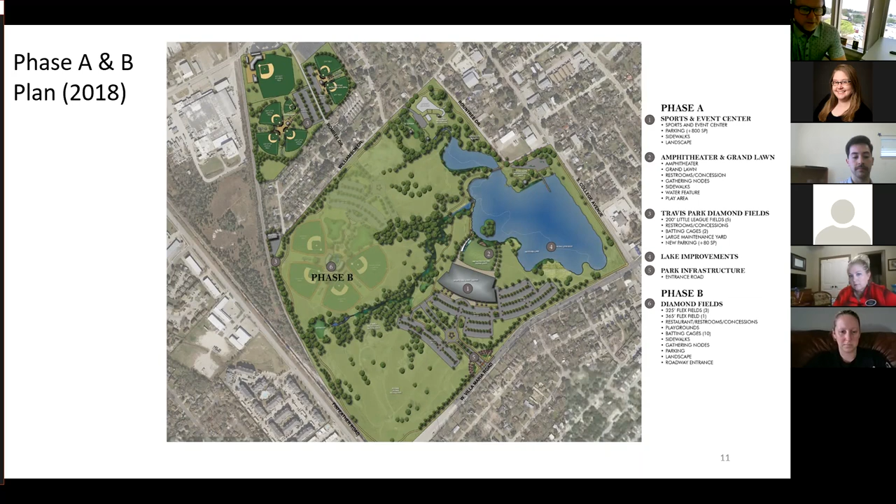Park infrastructure, an entrance road there off Villa Maria. And then phase B, maybe some type of flex fields, and that's still just TBD even today. So nothing's really changed in that.

And then in March of '19, we entered into a service agreement with Stonehenge Holdings out of Conroe, with the possibility of trying to get some private funding with some type of profit sharing - some type of entertainment, maybe somebody to come in and build a big indoor facility for us, and then they would manage it and run it, and the city would maybe profit share out of it, some type of an agreement.

That went on for about 5 months, and then we canceled that. There wasn't really much happening there, and didn't seem to be a lot of private money out there to do that sort of thing with. So we backed off of that and decided we would go at it on our own.

November of '19, we issued a notice of intent for about $75 million in bonds, and then signed an engineering contract with Mitchell & Morgan, a local engineering firm. And then they immediately went to work.

We knew what we needed it to look like from our master plan. So there was an ordinance passed by council reducing the speed limit there on Villa Maria for the Midtown Park Boulevard entrance into the park. And then a resolution was also approved by council notifying the intent to finance expenditures or bonds. In January, those bonds were authorized.

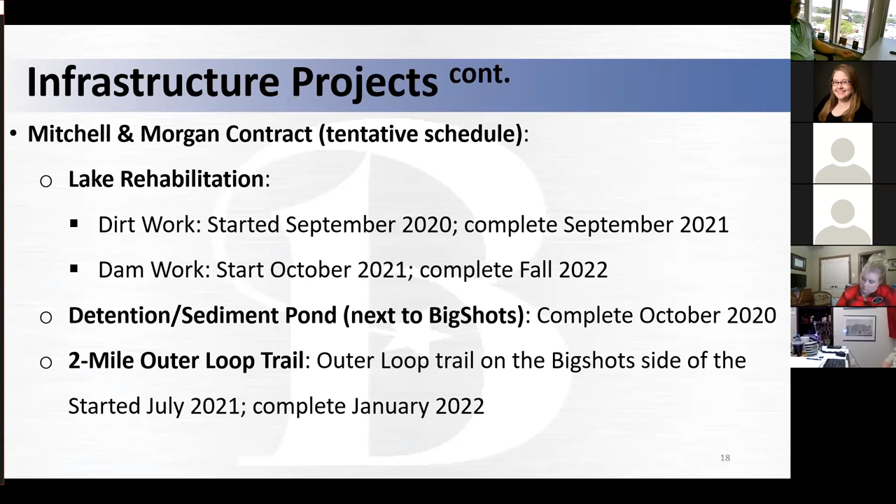If anybody's driven by it in a while, up Villa Maria, the gateway and landscaping's been completed there on the entrance off Midtown Park Boulevard. Big Shots driveway was started in June, and it'll be completed in October. Something that was added, the Midtown Park Boulevard is being extended all the way to Williamson, which is right there at the end of Bomber, where it comes from Carson. That'll be complete in April.

Our sports and event center is a little under 123,000 square feet. We signed a design build agreement with SpawGlass and PBK Sports back in July of 20. We hired Sports Facility Management out of Clearwater, Florida, to not only advise us and help with the layout of the facility, but they manage about a dozen indoor and outdoor ball fields throughout the U.S. We actually have a management agreement with them to operate the facility once it's open.

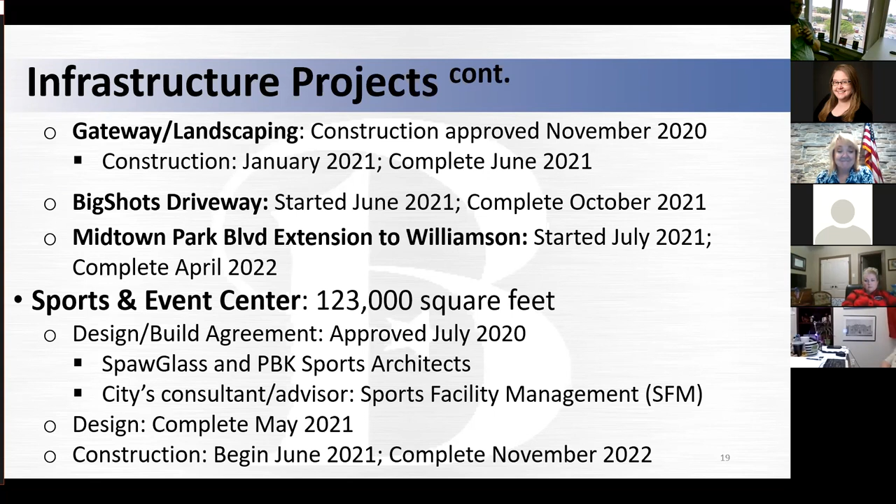The design was complete in May. Construction was started in June, and we should be complete, depending on weather days, in November of 22. So that's coming along really good.

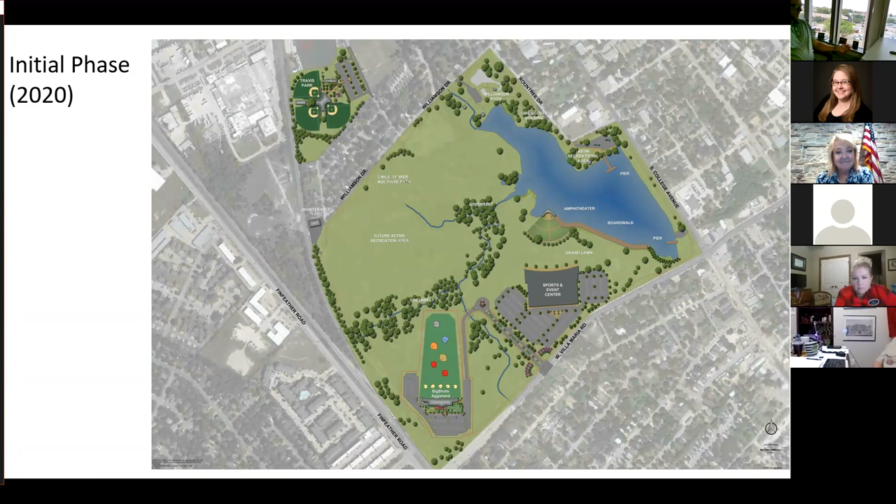So the final master plan we saw a while ago had the Big Shots. After we started working with PBK and SpawGlass, the architects asked right up at the beginning, where do you want the back of the building to be? In other words, where do you want the dumpsters and the loading docks and everything else? In this configuration, we really didn't have a location for that. Everything was visible from the park.

And then there were other discussions that went like, this really isn't something that needs visibility from a road or a street. You don't need traffic because it's a destination. People are coming from out of town.

They're coming to go to a tournament that their kids are playing in, or to watch something there at the indoor facility. So there's really not any use in putting it right on Villa Maria.

Our city manager and the mayor were really wrestling with having, I think this was showing 800 parking spots, all being seen in Villa Maria, and that really wasn't preserving that green area. We still need parking spots, but we felt like we could spread it out a good bit to where you just didn't have a big black spot within the park.

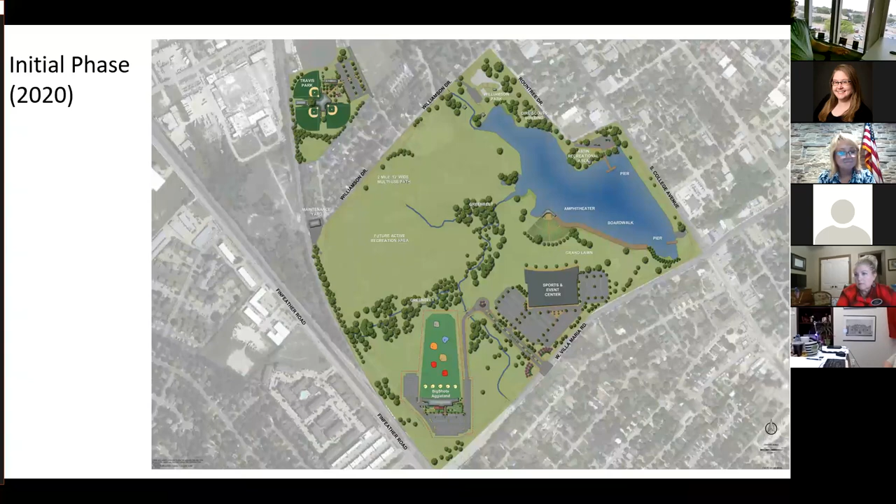So within that first meeting, we rearranged it and moved the indoor facility back on the backside, right off of Williamson, at really the intersection of Williamson and Bomber. To do this configuration, we actually had to go ahead and extend Midtown Park Boulevard all the way through to Williamson. You'll see this configuration here.

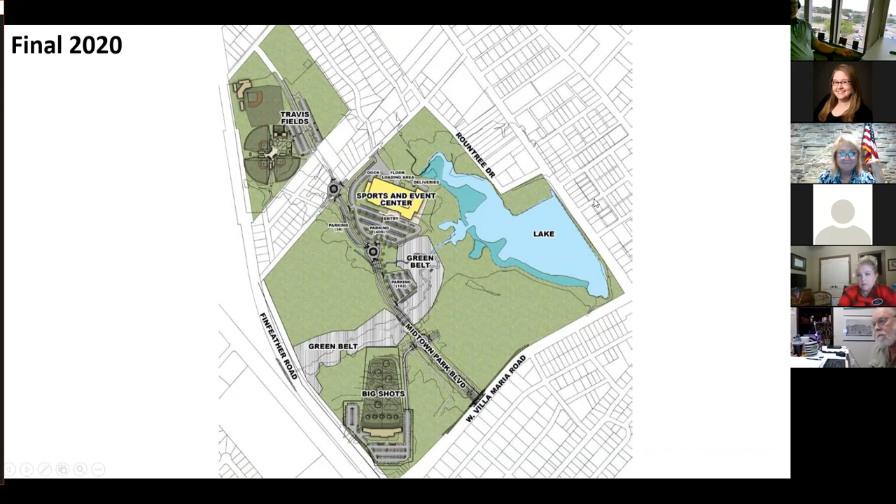This was the first roundabout that's built today. We're adding a roundabout here for entrance into the Legends Event Center, and then there'll be another roundabout at Williamson and Bomber. There's some other follow-up projects that'll happen in the future that'll redo Williamson, redo Bomber all the way down to the roundabout here. And then the South College project is coming up as well.

Legends Event Center will have 8 full-size high school basketball courts that can be curtained off individually or quarterly, however you want to do that. Those will be striped as well for volleyball.

It's just going to be a big open court area for gymnastics, wrestling, pickleball, archery, soccer, really anything that you could guess, cheerleading, trade shows, exhibits, concerts, mini conferences. There's even a separate e-gaming room in the facility, and we'll look at the floor plan here in just a second.

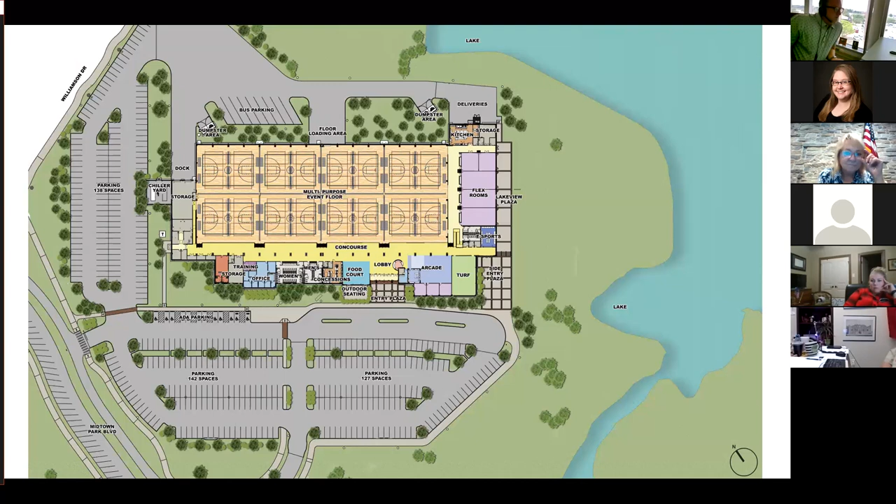It's a little different view. This just shows another view of the floor plans, flex rooms, esports rooms.

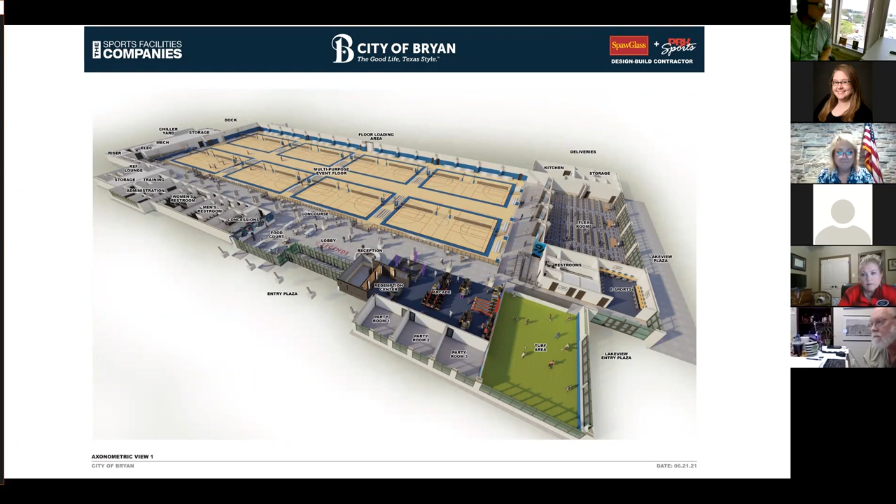This is walking in the front door, the kiosk to the right. They'll have an attendant there, and then this is what you'll see. Concessions off to the left. They've got a 10-foot halo video board for displaying and advertising current, what's happening, the schedules.

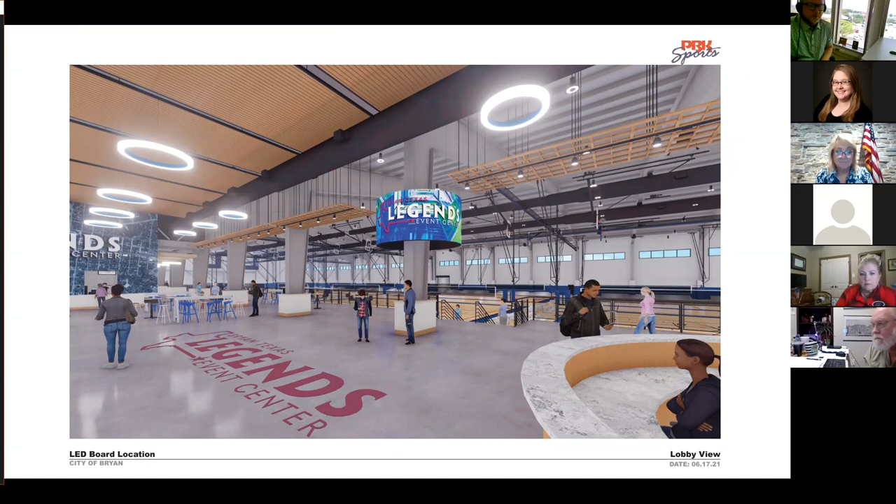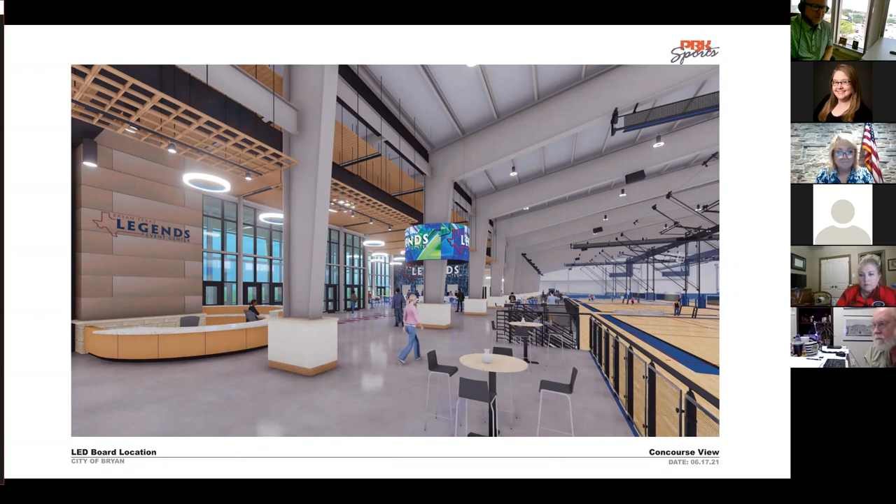This is from the court looking back up toward the front, back toward the concessions, the kiosk there. Tables set around the edge for families to eat and watch the games. Just another little different view from the concession area.

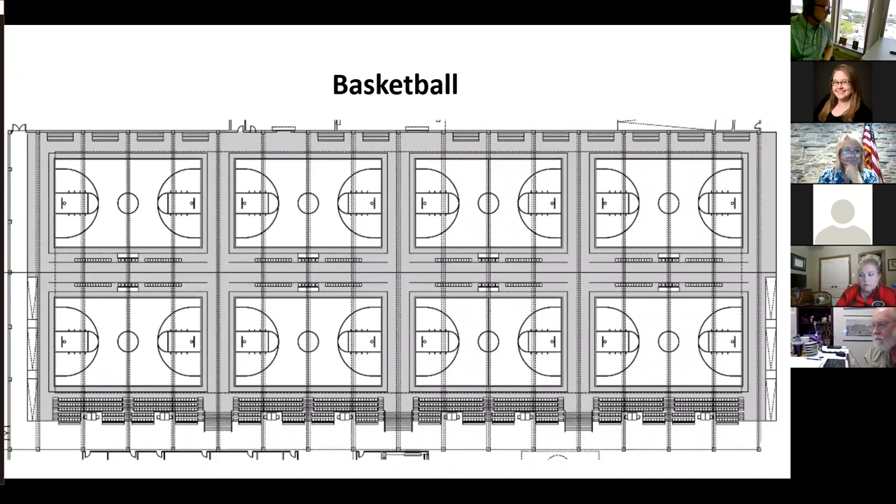Like I said before, the 8 basketball courts and then the 16 volleyball courts. SFM recommended using tip and roll bleachers for the different configurations. They can reconfigure. The way we're setting this up, they could go in about 8 hours and turn everything around from a full-blown basketball tournament to a full-blown volleyball tournament. All the bleachers and everything are tip and rolls.

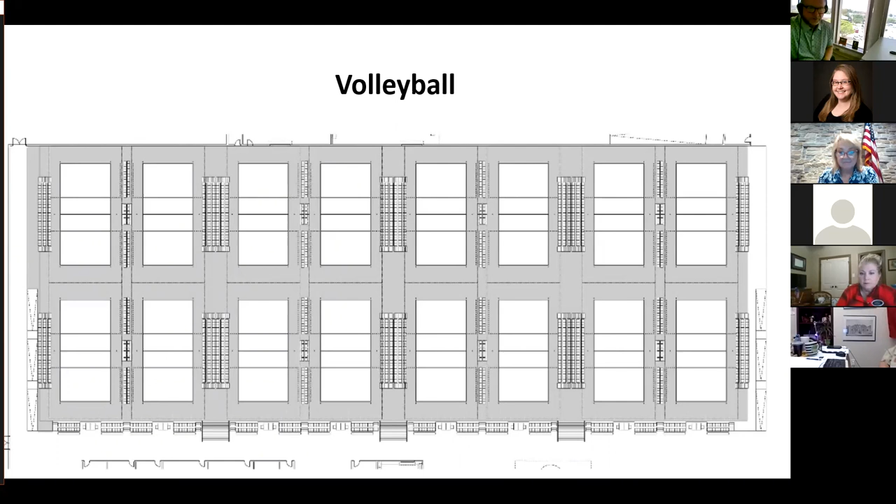There are some built-ins along that bottom side. I believe there's 2 rows of permanent seating, but the rest of the seating is made up of tip and roll aluminum bleachers. Just showing where you could shut down half of it with curtains.

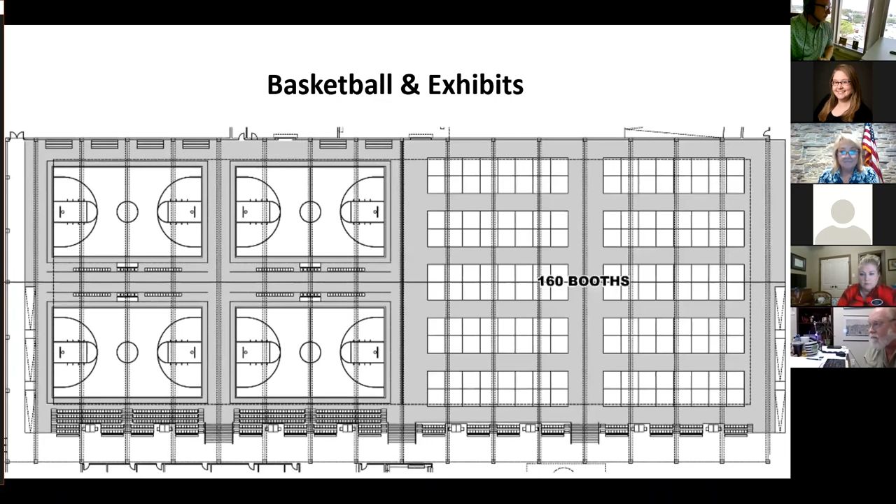We've got curtains that hang from the ceiling that will drop down, so you could do a concert on one end - not that you would want to do that, but you could have basketball on one end and do a concert or some other type of event on the other, or a trade show on half of it, 160 booths, double that to 320 booths.

And that flex meeting space, you could have 320 floor seats total in the full configuration, to a conference layout where you're actually separating the rooms with those division curtains, and then banquets and wedding layouts.

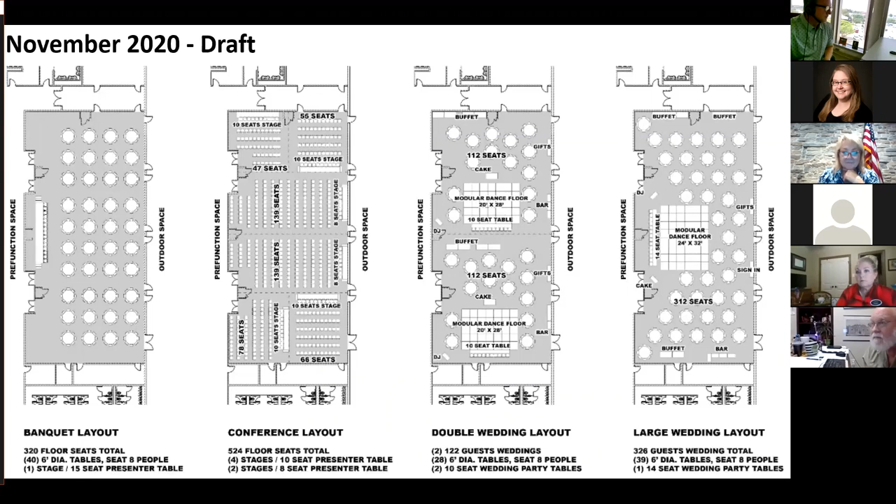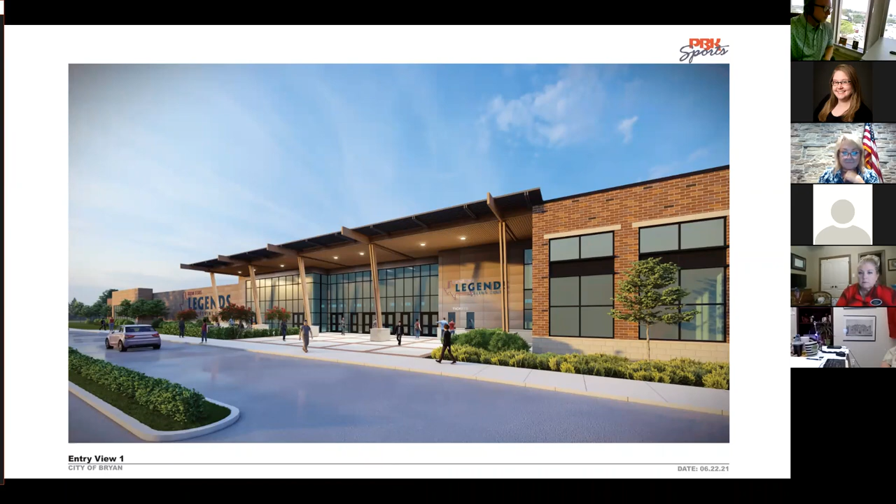Exterior, the elevations. This is using the latest colors. I think the brick may be a little bit darker now, but that's for the most part what the entryway is looking like. Just another view, seeing the patio on the right.

You don't see the lake there, but that patio will be looking down the full length of the 23-acre lake.

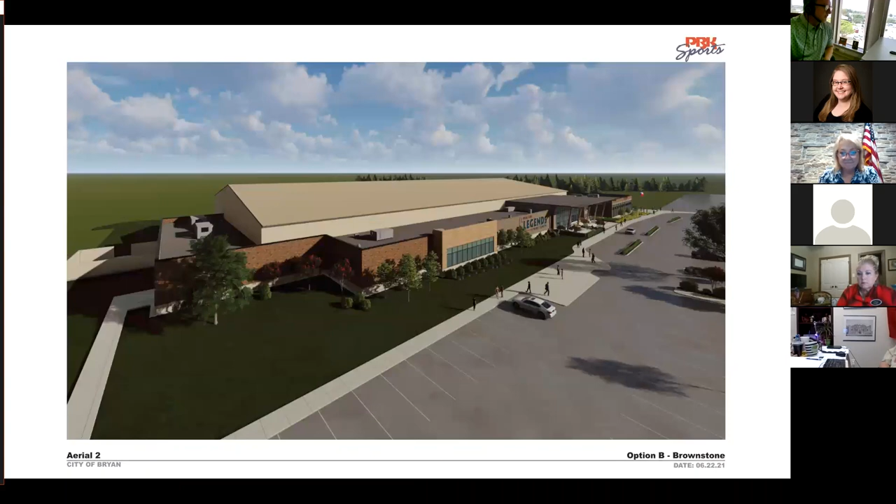It's another view there. That patio - we're not going to have the planters in there unless we go back and add those back in. But you can see, I think the architects at one time put in the renderings some sand volleyball courts.

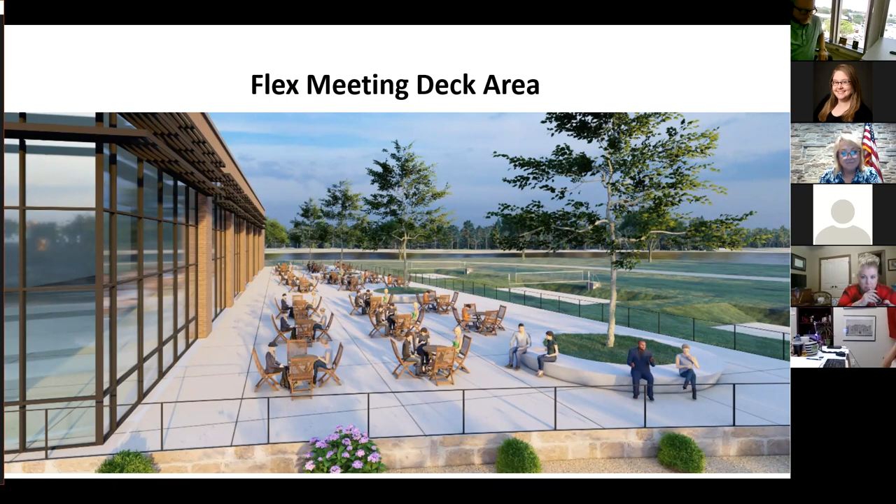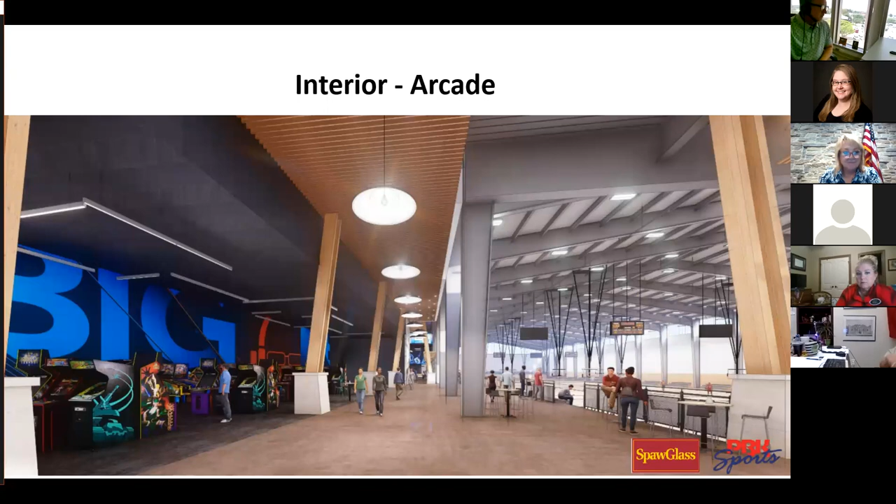This would be looking out of the flex space to the lake, arcades, and some other park amenities. There's going to be a boardwalk. That exact configuration hasn't been decided yet, but somehow we've got to work that in with an outdoor amphitheater.

There's going to be a couple of fishing piers. We've actually done an RFP where we've got some proposals for the lake to be professionally maintained. There'll be some water features, kind of like out at the Stella Lake out there.

There'll be 4 of those fountains in the water. Those are to help with the health of the lake, as well as they'll have LED lighting and stuff like that for lights at nighttime, so we can add some nice water features.

We're working with several different groups on doing some canoeing, kayaking, and fishing gear rentals for the lake. Of course, outdoor beach volleyball, we're waiting on a proposal from SFM on that. And I'm working with 3 different firms with NDAs right now, wanting to locate in or adjacent to the park. These are just - if we can get 1 or 2 of these, it would be awesome. It's just what it will bring to that area, redevelopment and just entertainment, family entertainment.

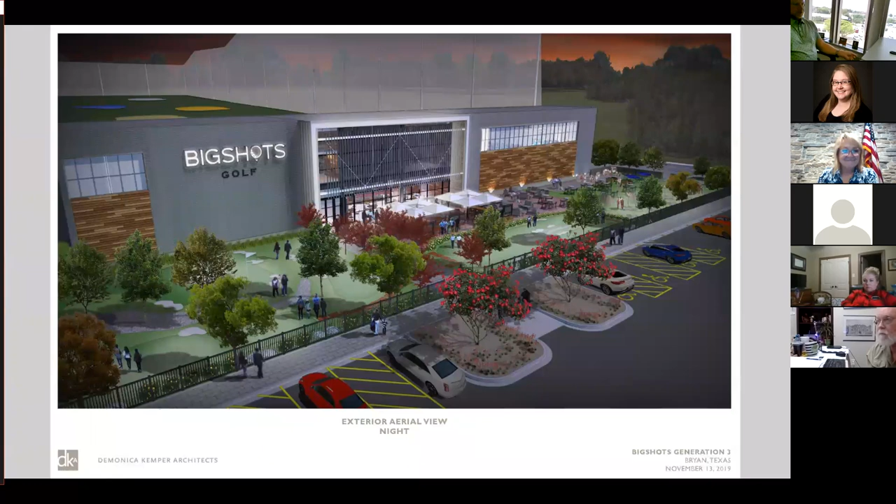Big Shots - we hadn't talked much about Big Shots, but like I said, they're supposed to be open by Christmas. We have a meeting every Monday morning and they're still holding to that. So hopefully we can make that. And their contractor tells me that they should be very close to making that. So we'll see.

That facility is owned by kind of a joint corporation called Big Shots Aggieland, Club Corp, as well as Dr. Jim and Allison Butler of Bryan College Station. Some of y'all may know them. About a $14 million facility and site investment.

Within the facility, we're looking at about 40,000 square feet with 60 bays. When I say a bay, that's one couch and seating area for playing the game, the golf. A lot of people know what Top Golf is, and I've been to both.

We toured the new Big Shots facility in Fort Worth about 3 months ago at their grand opening, and it's very, very similar to Top Golf. In fact, the Big Shots folks don't mind if you do call them Top Golf. It's the same principle - the technology is a little bit different. I think the one thing, the way it's been explained to me, is Top Golf uses sensors in their golf balls.

There are special golf balls that don't necessarily hit like a regular golf ball. I'm not a good enough golfer to tell the difference, or whether there's a sensor in the ball, but evidently the golfers can tell. Big Shots uses Doppler technology, like the Doppler radar the weather guys talk about, to track the balls. That's really the difference.

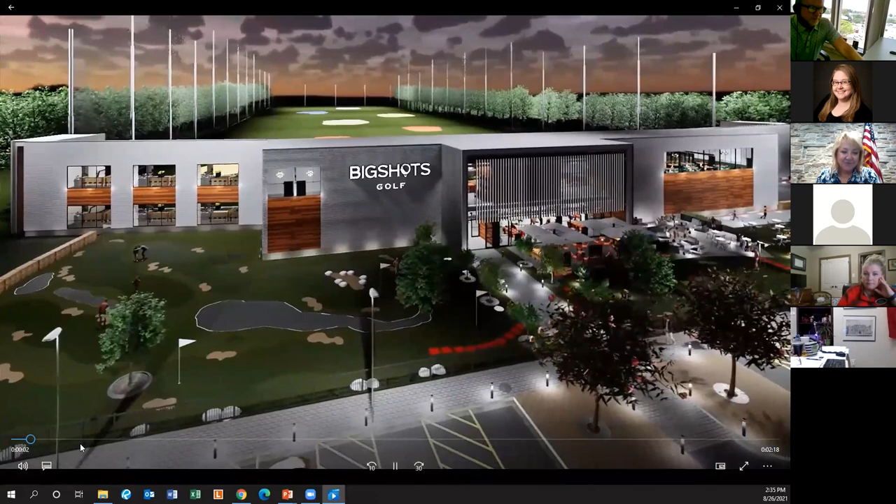Frank, we're not seeing the video. Frank, did you hear Rose there? We are not seeing the video, say that again. Are you seeing it, Rose? No, sir. Well, I'm seeing it, it was working earlier. At the top where you have your screen share, do you have it set to share just one window, or do you have it set to show your whole screen? Right now, are you seeing it where I have a link that says 'Bryan economic development'? Yes. Let me... if you go to your screen share settings, sometimes it will separate them out and just show one window, or you have the option of doing your entire monitor. I think that might be what's happening, but I'm not sure. Zoom is an interesting thing, technology.

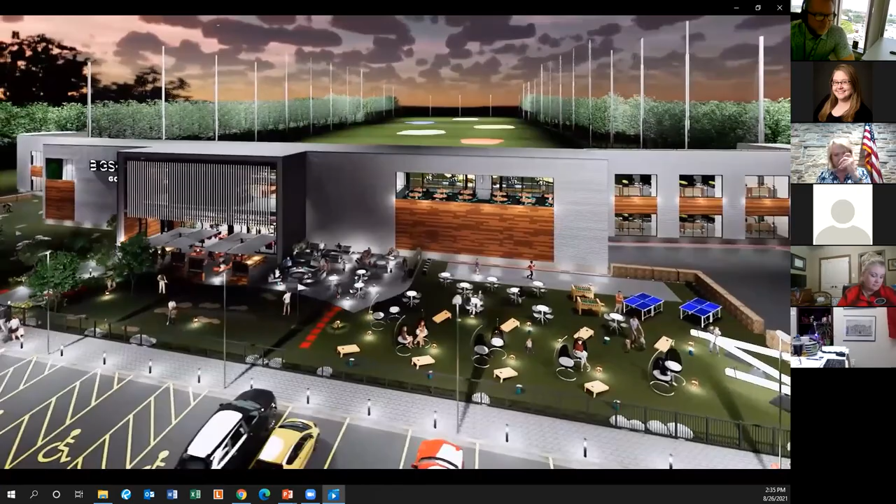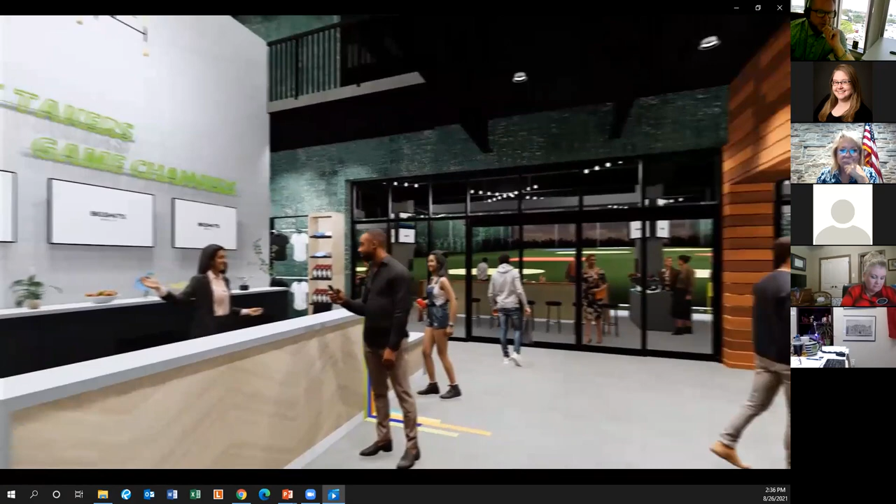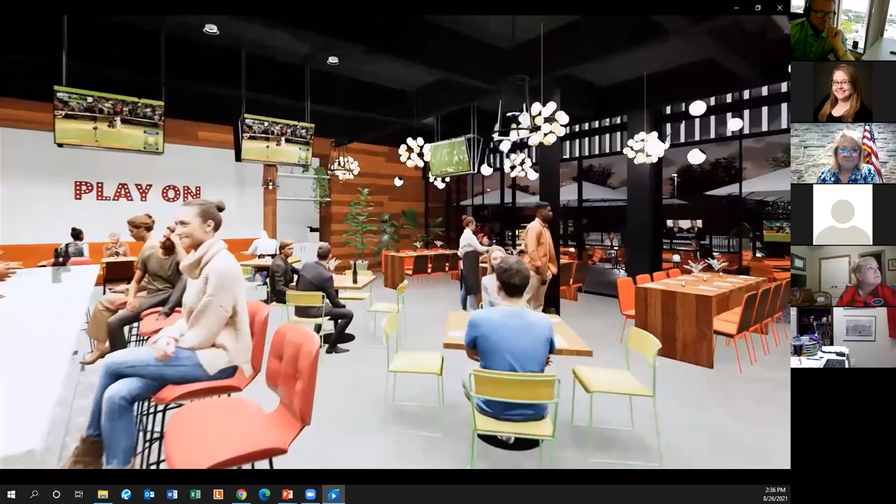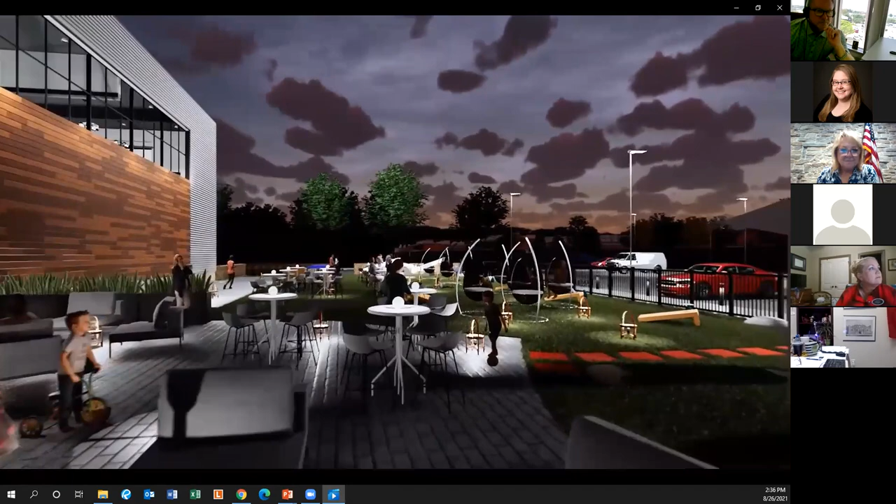And this is going into the entrance. What's neat about this facility is it's got a putt-putt golf out front that you can play, with seating areas as well. This is going into the entryway. Those that have been in a Top Golf before will recognize the bays out back. There's kind of a putt-putt area there too.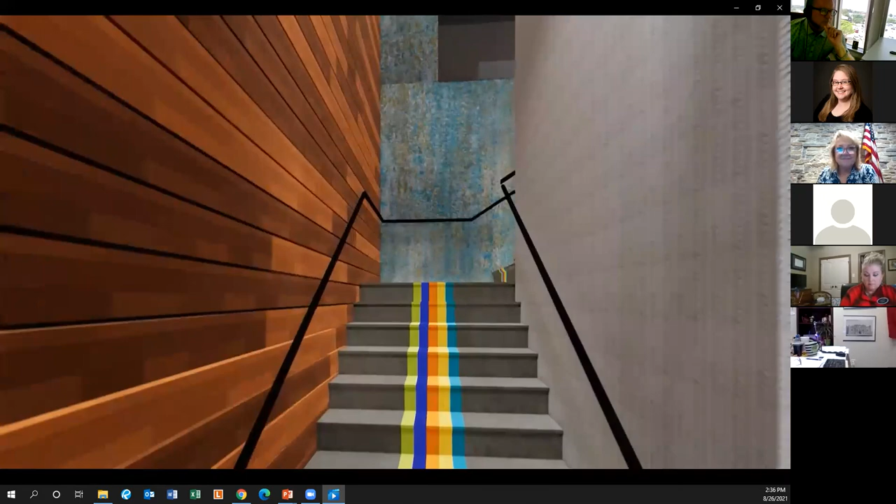The way this facility is laid out, it has 30 bays on the bottom floor and then 30 up top.

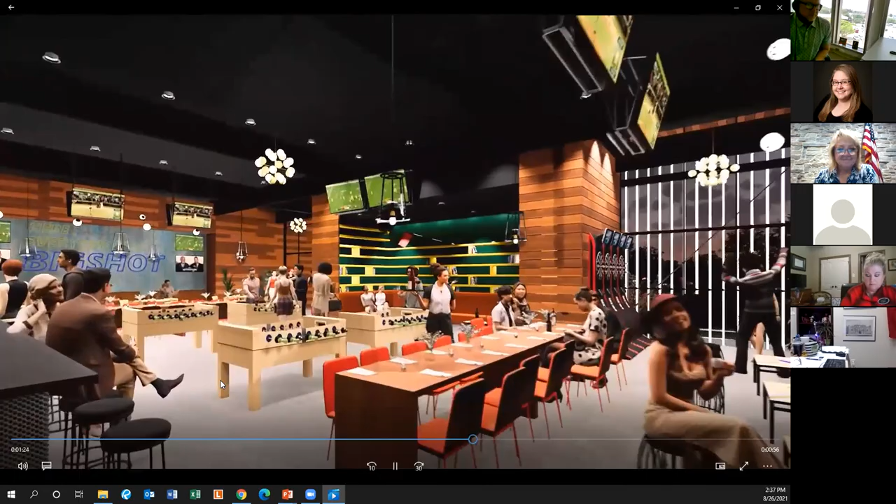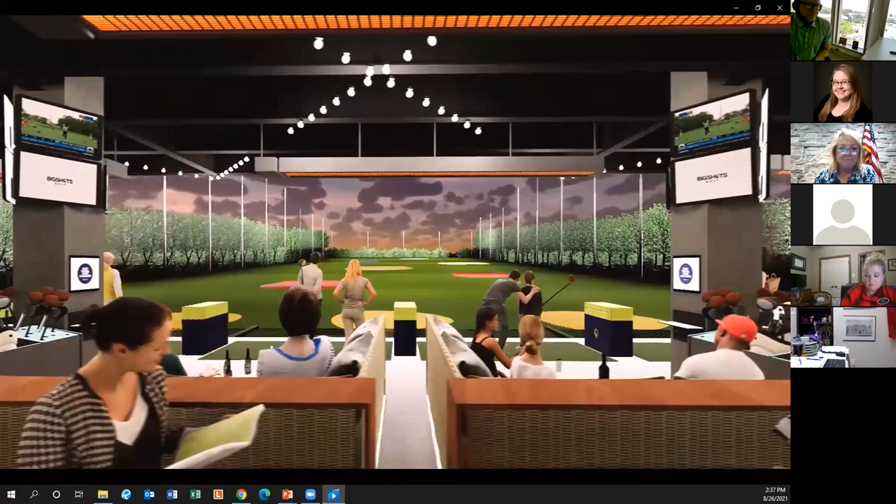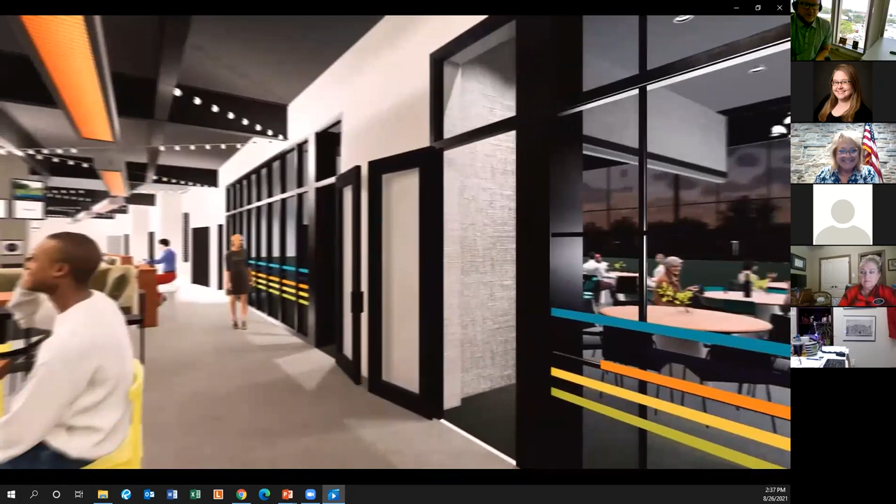Feels like we're in a video game, Frank. Well, you kind of are. I don't know who all's played it, but it's a lot of fun. Only problem is nobody's moving.

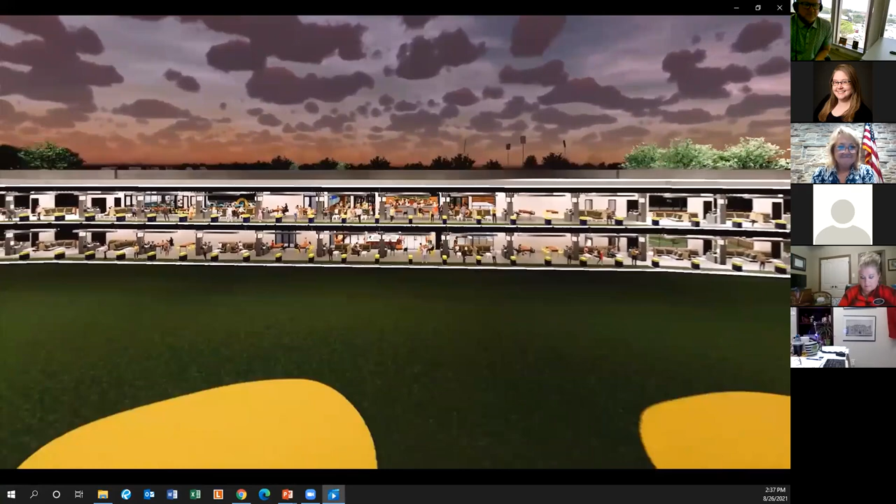Alright, are y'all seeing a new screen that says Construction Projects affecting Midtown? Yes sir. Okay perfect, alright we're back on track then.

As I said a while ago, there's some other projects. There's a project that was done on South College from Villa Maria to the College Station city limit line that's been finished for a couple of years now. That has a big wide multi-use path that A&M actually went and extended it on up to University, so all that's tied in. There'll be a phase 1, 3, and 4 that will take and improve South College Avenue all the way from Villa Maria to 29th Street, which is there at downtown.

Between now and '26, the first part of that will be done between Villa Maria and Carson. That construction is supposed to start in 2024. The engineering's been started on that, so we'll be able to hit the ground running.

Williamson Drive is the road that is really the back door there to the big indoor facility now. That work will be done out of the '26 bonds, and then Bomber Drive, Carson to Williamson, will improve that. And then something that plays into everything downtown is that downtown quiet zone, where that project has been started. I don't know if anybody's been downtown lately, but they've started medians or islands there at the crossings.

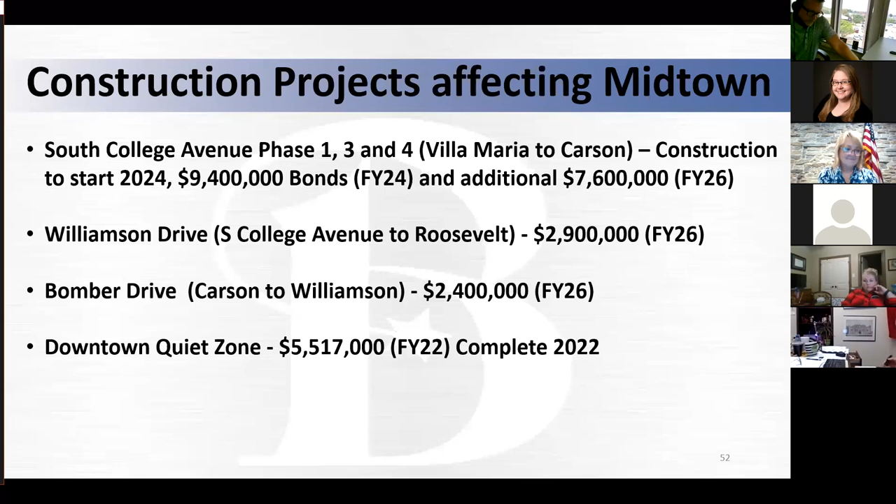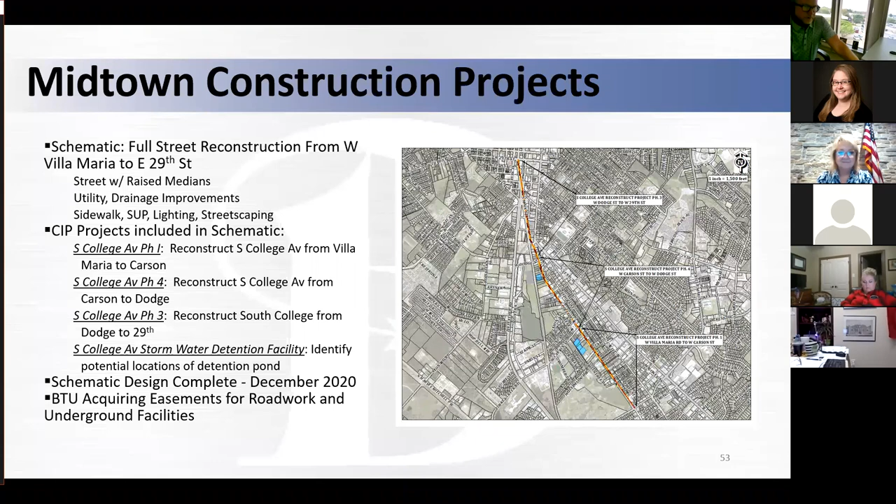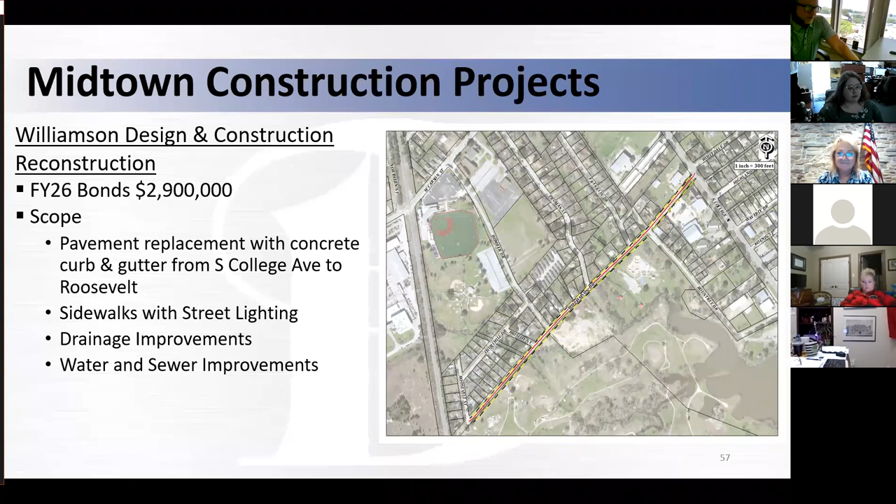So that's in the works, and I'm not going to spend a lot of time on this. This is just showing the different phases of that South College improvement. There'll be a big multi-use path and a sidewalk along Carson all the way to downtown that goes to University when this is all done. Anyway, if anybody has any specific questions or wants a copy of this presentation, I'll be happy to give that to them, but I didn't want to spend a lot of time on this. It's kind of a total package, total redevelopment of that area between A&M and downtown Bryan along that South College corridor.

So in summary, Midtown and Travis Bryan Midtown Park is what this project is. The lake will be through here in the next month. Travis Fields, October of this year. Big Shots Aggieland by Christmas '21, the Sports and Event Center.

It says summer 22, but it's really November of 22. In the future, we're going to have an amphitheater, but maybe the future will be some type of enhanced amphitheater, maybe around the stage area. We're going to have big green fields in the stage area. We may not be covered right now, we've only got so much money, so we're trying to save money here and there to make something happen with an amphitheater. Additional fields, we don't know what types are needed right now.

That'll have to come in the future. And of course, the boardwalk - the mayor is pretty adamant that we're going to have a boardwalk. So we're going to have a boardwalk, and then maybe some other expanded recreational activities and family entertainment.

Any questions and answers? I can show some actual drone footage of the construction site if anybody's interested. I did have one question: what is the square footage of the floor space for the basketball courts and trade show area? That's a little bit north of 80,000 square feet.

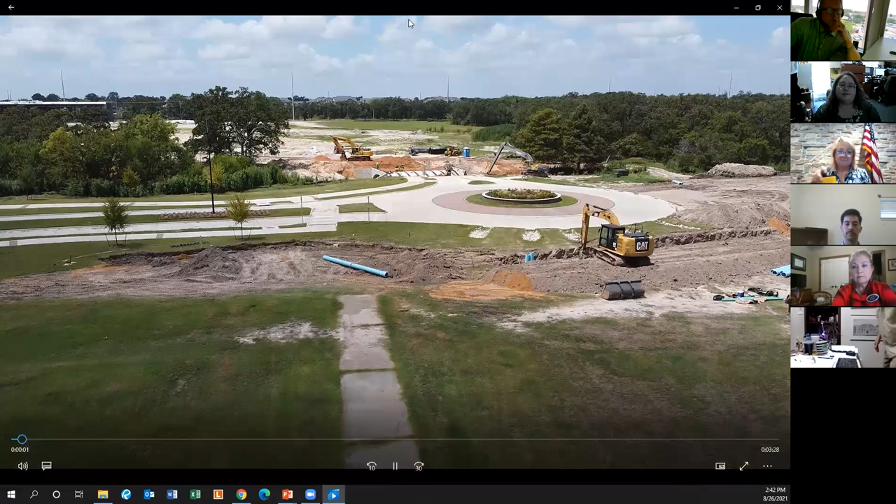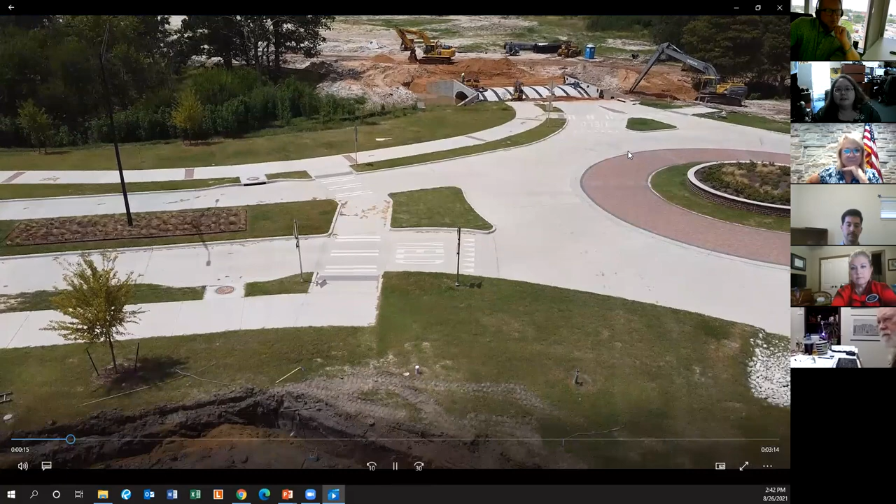All right, I think you can go ahead and show some drone footage, unless anyone else has questions. Let me see if I can get it to where y'all can see it. Y'all seeing the drone footage? This is the start of Big Shots driveway. This is the first roundabout. The landscaping has been done on the Midtown Park Boulevard.

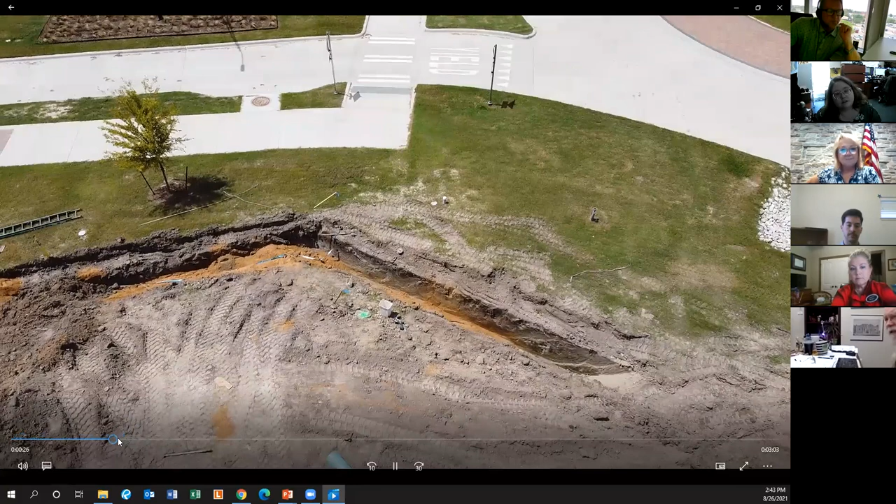This is the bridge for the driveway to Big Shots. I'm kind of fast forwarding because I've got an engineer driving the drone right now and he's interested in the water lines.

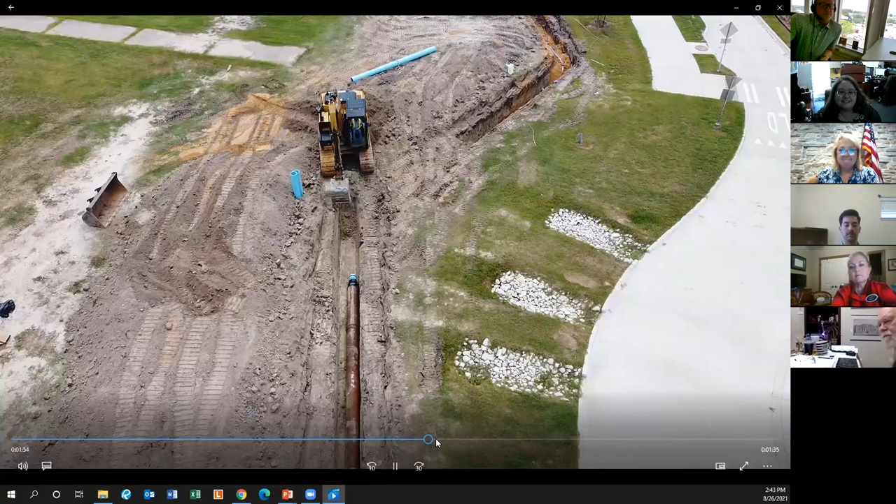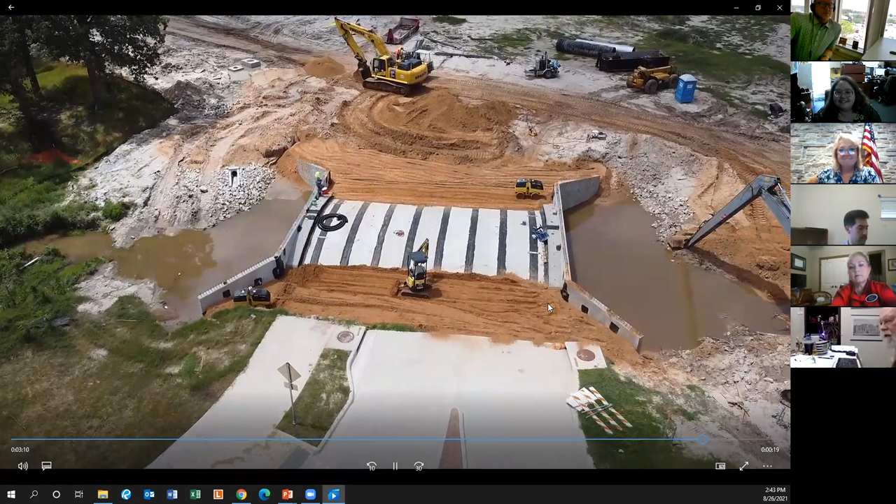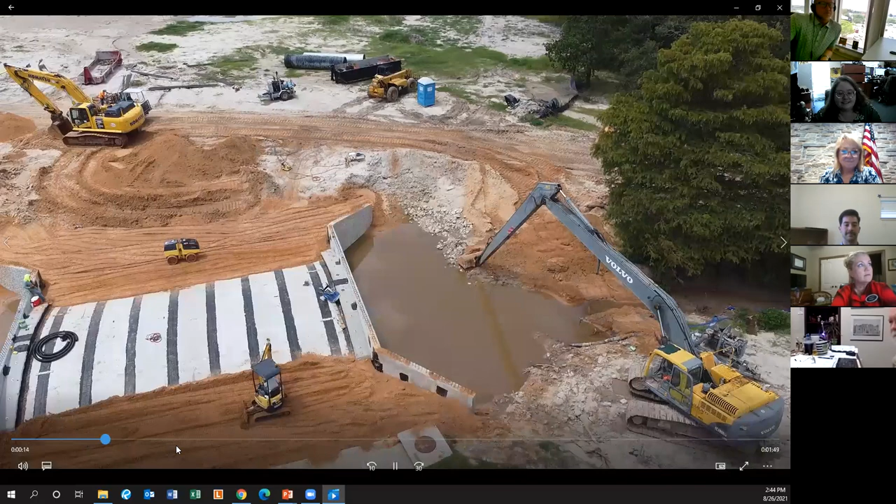I'm going to get a better video here in just a second. There's a driveway up to the Big Shots. And they're supposed to start putting their netting poles up in a couple of weeks. Once that starts, they'll do all their drainage and everything. For that whole part that you hit the balls, it's actually a synthetic turf.

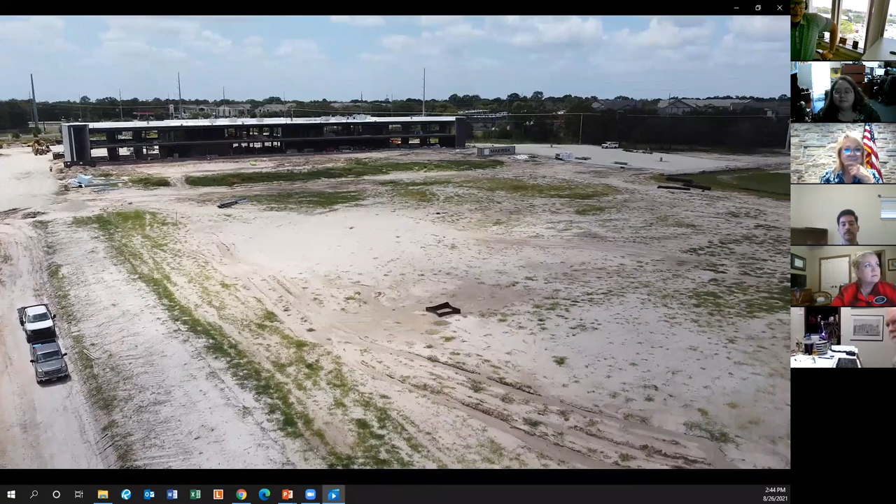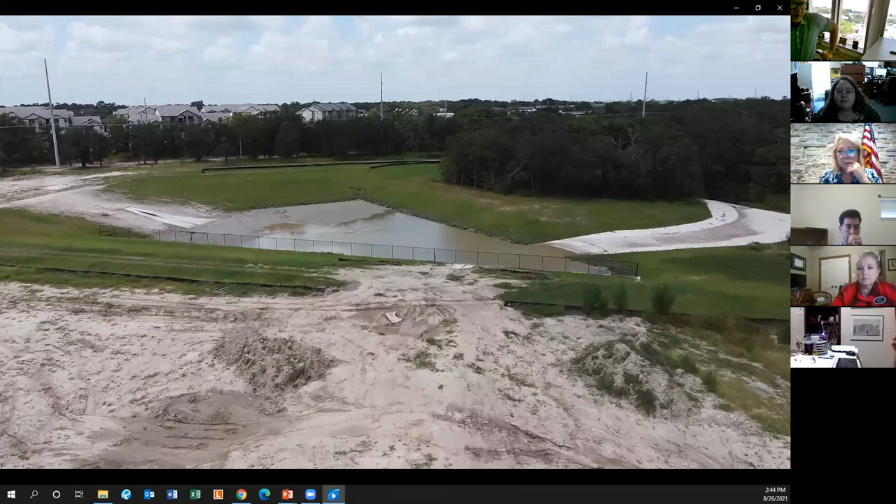Evidently they do that at the very last. There's that sedimentation pond I was telling you about a minute ago that we put in to capture that sedimentation. The way that thing is made, it's got a concrete wall on one side. Once that fills up with a certain amount of sedimentation, they'll just take front end loaders in there and scoop it out, and that prevents it from getting in the lake and filling it in.

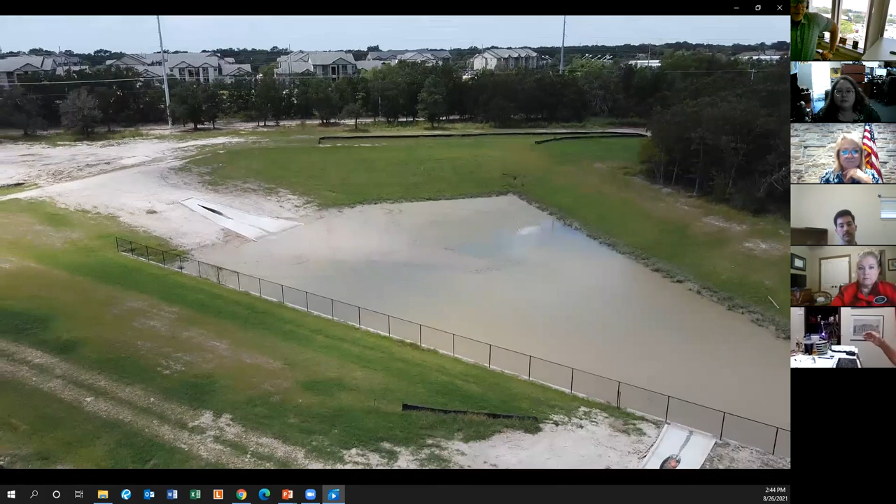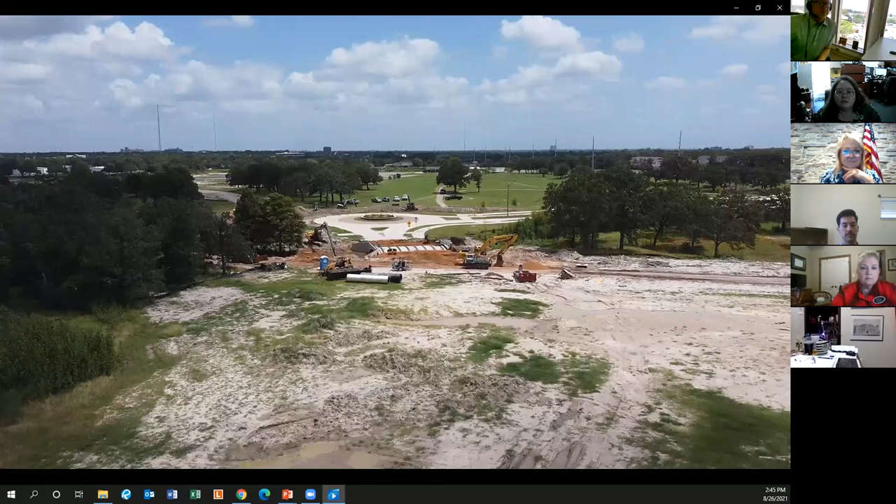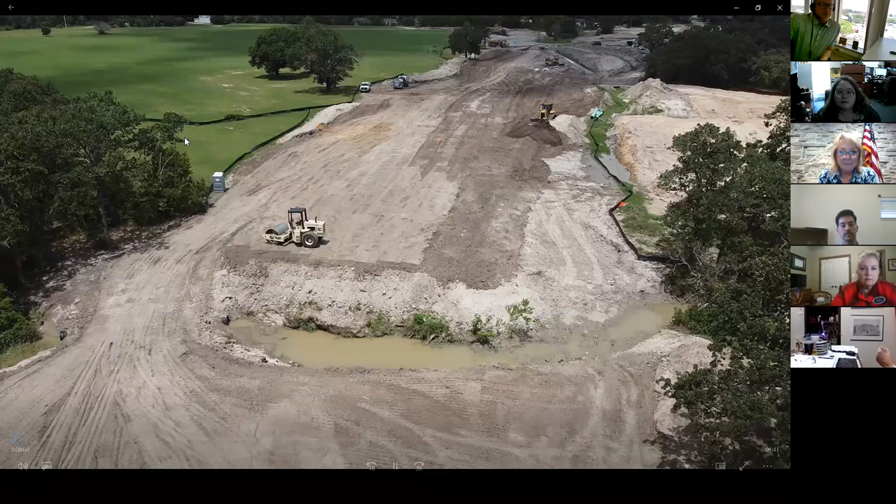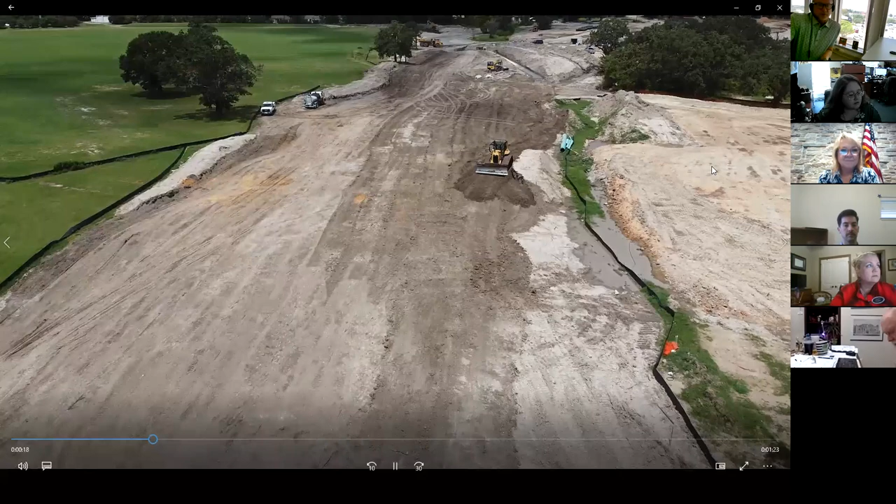Villa Maria out there, you can see, and that's that first roundabout. This is the extension from that first roundabout to Williamson. This will be our Midtown Park Boulevard all the way through the park. That is a satellite parking lot right there, dirt pile to the right, or the area. I don't know if y'all can see my cursor, but that area will be about 160 parking spots there.

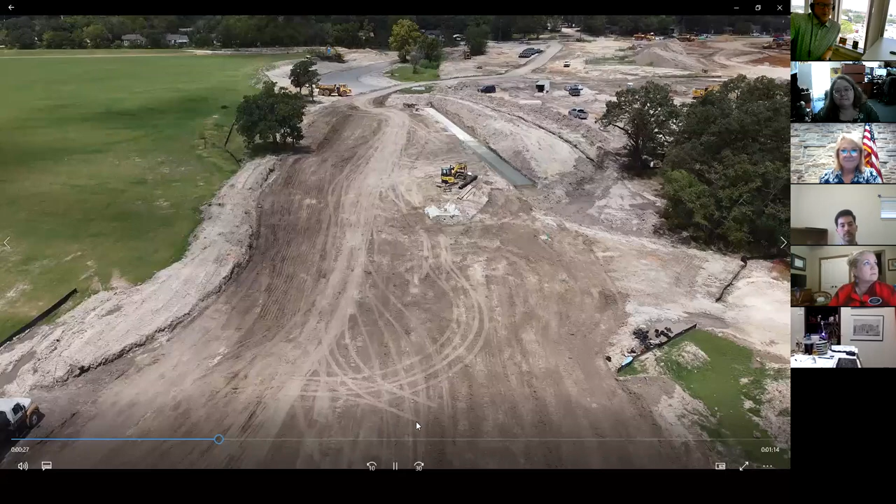This will be an intermediate roundabout. This is going up under the roundabout. It's a rectangular channel for the water to flow through.

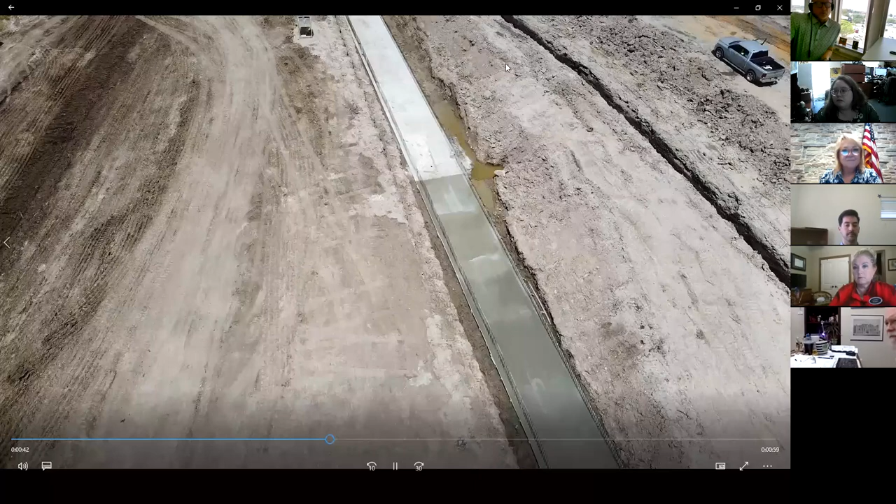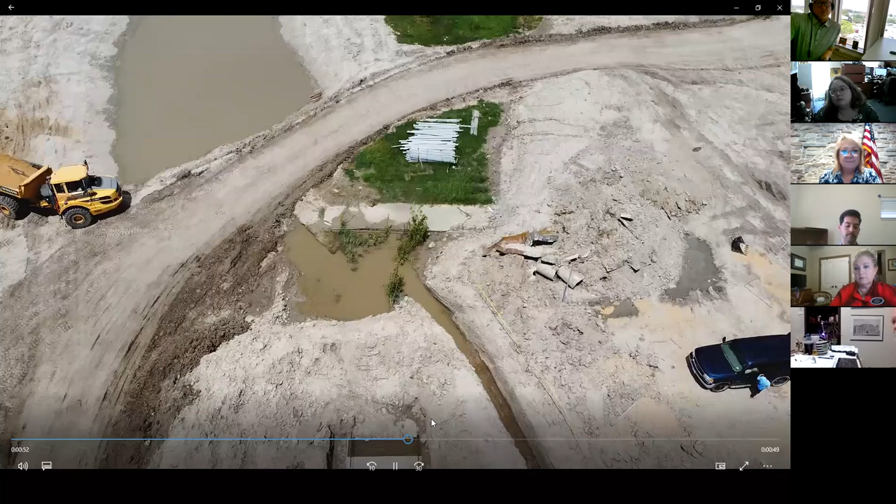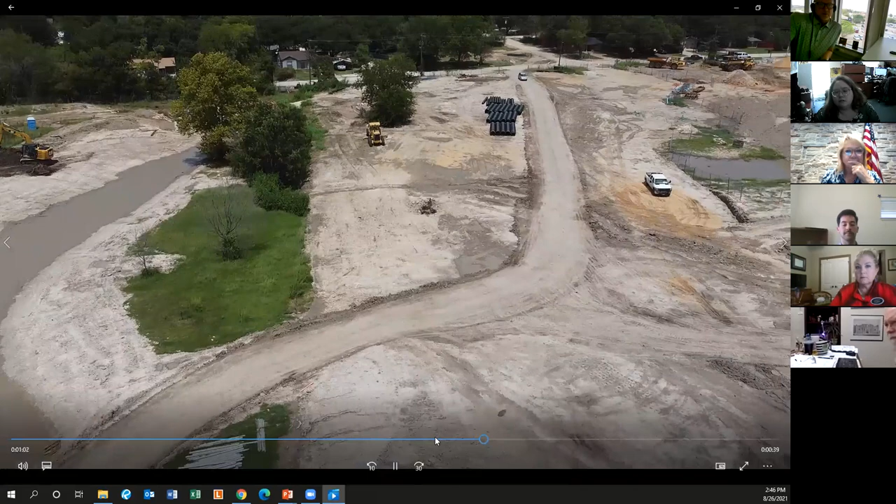And then that's Williamson there at the top of the screen, and there's Bomber Drive, that's an intersection there. So the red dirt is the foundation, or the select fill that's being put in for the foundation of the indoor facility.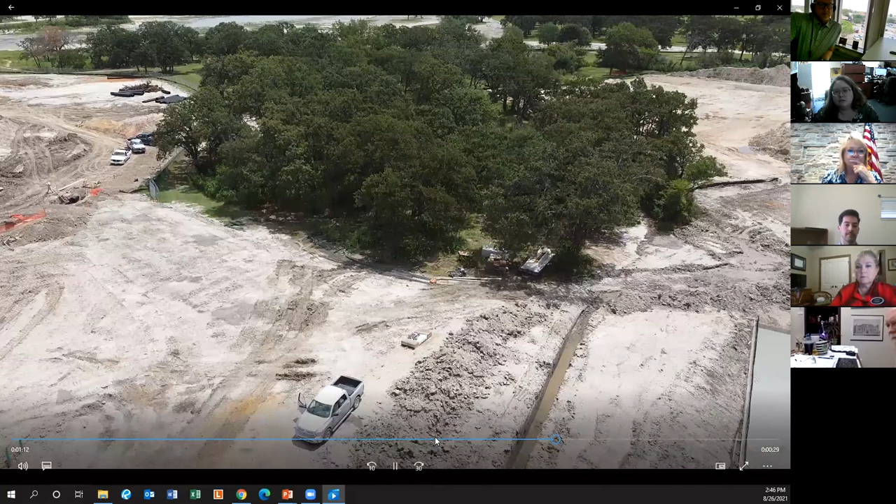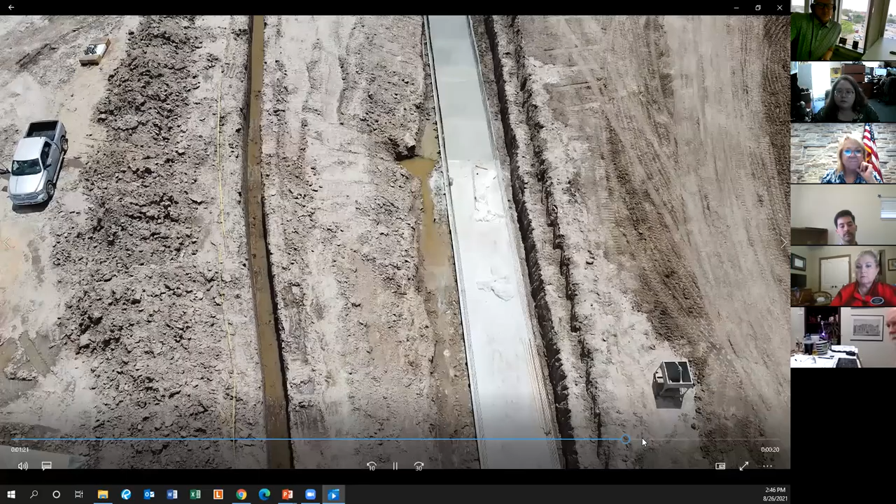And this is looking back toward Villa Maria with Kyle Field there at the top, and then the lake off in the background. We have not allowed the lake to fill up. There's still one more valve that needs to be put in so that we can completely drain it down, but they won't allow it to fill up until that's done.

Anyway, that's kind of what I've got. Anybody has any questions, I'll be happy to take those. We get new videos every week. If somebody actually wants to go out and see the site, I'll be glad to tow them around in the air-conditioned pickup or on a Polaris.

Anyway, I hope you kind of are excited about what's coming to Bryan. We are. I think our consultants are telling us that we'll have over a million visitors each year just during the tournament play, is what their estimate is. So that's a lot of heads in beds.

Anyway, great. If anybody has any questions, Caitlin, I guess you take over. No questions? Y'all are a quiet bunch today.

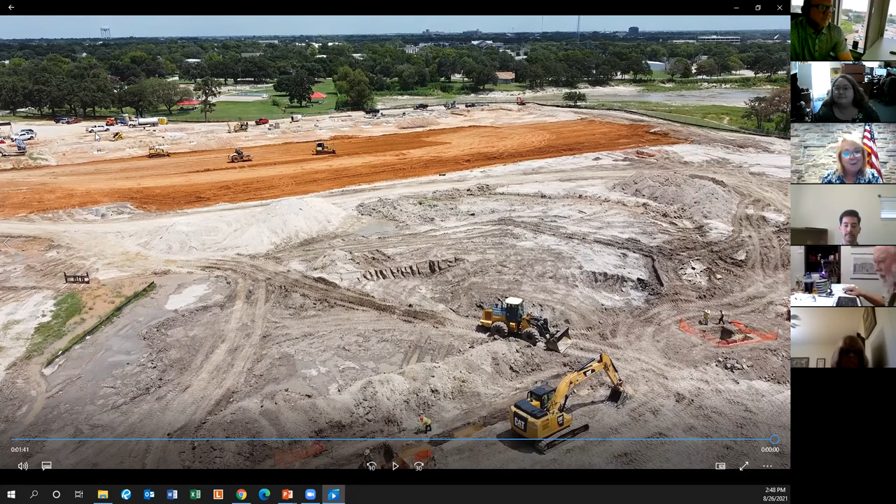A lot of great information, and wow, the city of Bryan just continues to do great things. I'm really excited about some of the smaller venues within the bigger venues, that you can section out and do different events. And it was just very exciting to see that we're going to have some other meeting options, meeting room options, and potentially trade show options too. Yes.